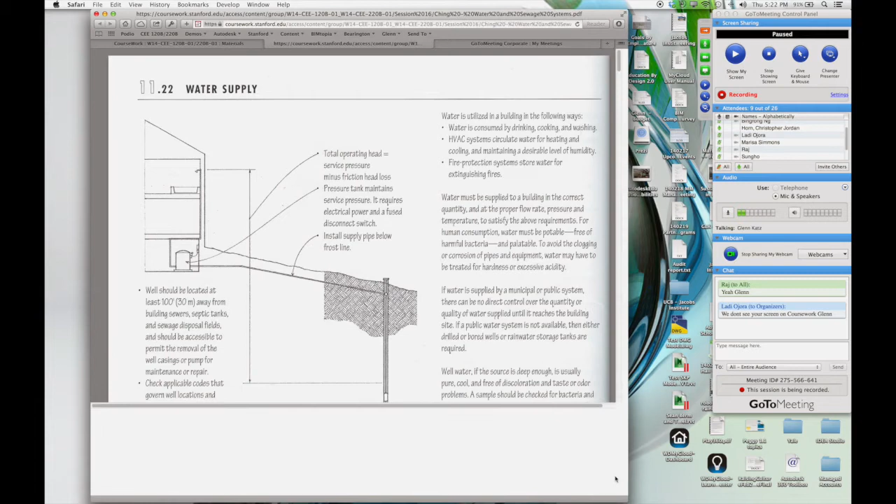In general, as we think about systems, there's supply systems as well as systems that take water away. Actually, let me open it up in my PDF reader instead, it's a little bit more fluid. I'll look at it online that way, but please go ahead and download it that way.

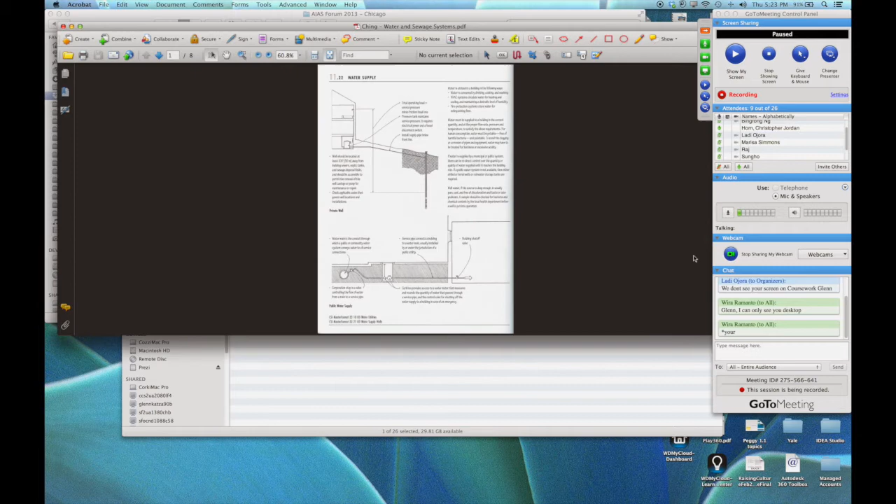Let me pop out of here, go over to session 16, and we'll get to that same reference. Let me pull that window over, make it a little bigger, and see if we can make that make sense. Hang on, let me show my screen. How about now? I think maybe I hit a pause in there somewhere. Very good, thanks Wira for pointing that out.

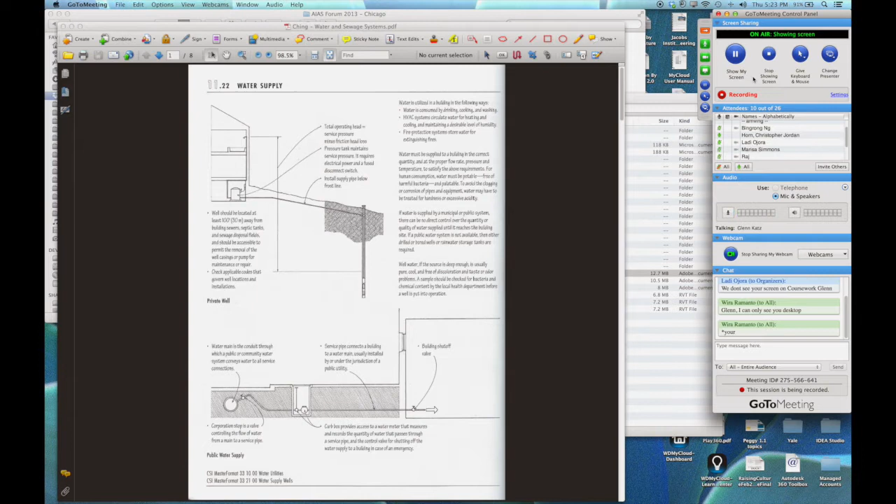Okay, so looking at this reference, there's a lot of useful information here. The important thing to think about water systems, both on the supply side and on the sewage side, is really understanding how water pressure ultimately allows the water to get to the final destination. What tends to happen is on the water supply side, these systems are pressurized.

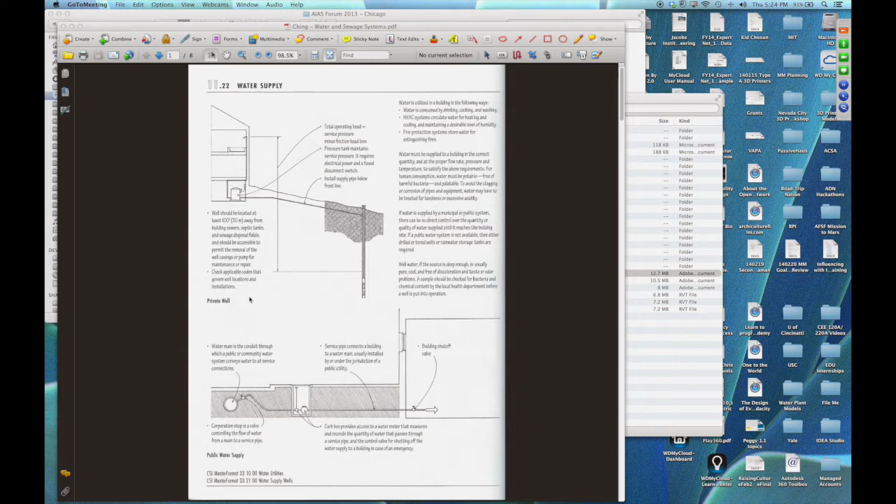So if they're coming from a well, we often take them into sort of a pressure tank, which feeds up into the building. What happens in a larger building in most city contexts is we'll do something that looks a little bit different.

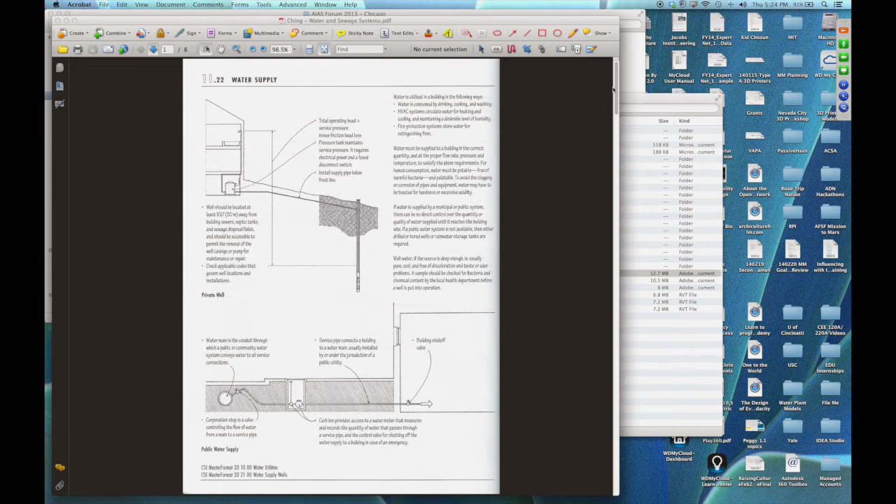Let me see if I can get a page forward to it. I'm saying go down and it doesn't want to seem to be cooperating. We'll figure out why in a second here. What's going on with Acrobat? Seems like it's locked up in some way. Nope, there it is, okay, here we go.

So, flipping on over - in most large buildings, though, as opposed to strictly depending on the water pressure just from the street coming in, what ends up happening is we set up a building system that's a little bit different, where we'll actually pump water into the building, pump it up to a tank, which will be up on one of the higher floors of the building, and then use gravity to feed it down to the urinals and the plumbing fixtures and all the different endpoint sources within the building.

An important thing to know about this is that depending on the height of the building, you may have many different tanks feeding things down. For water pressure, the height of the tank relative to the endpoint, the tap that's actually using it, really does a lot to influence what the pressure is, and we can put little pressure valves in there to moderate that. But if you have a tank much, much higher than the endpoint, you'll have very high pressure water, so we try to moderate that so you don't have incredibly high pressure on the lower floors where the height difference is great, and much lesser pressure at the upper floors.

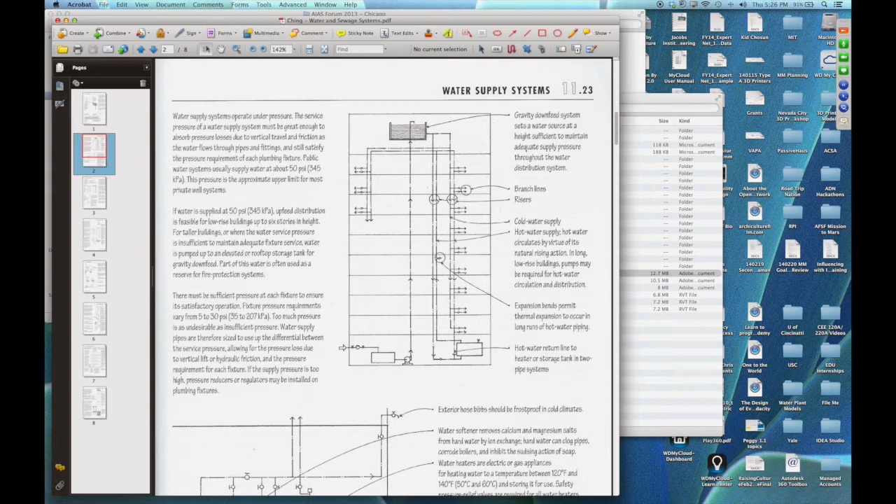But the whole idea of bringing water up to a tank and then feeding it down is actually a very common approach in a lot of big buildings. So you have a ready reserve, and you're not as subject to fluctuations in the main water supply throughout the city. You'd like to not depend on the pump pressure, but you can even pump it up to these tanks at off times, like in the middle of the evening, using power at night when it's cheaper, and then ultimately use the power or just gravity to feed off of it through the day, which tends to be a pretty good approach.

In terms of the uses and how much demand each fixture creates, every fixture you put on has a certain flow, a certain number of fixture units it creates. Water closets tend to be one of the bigger users, like 6 to 10 fixture units, urinals 5 to 10 units, while lavatories where we wash our hands are really not so bad.

Yes? Yes, Ladi? Oh, please, let's go ahead.

Okay, so let's see what's going on here. We'll roll on back. So starting with Bingrong, will the water pressure from the mains be sufficient to reach 2 or 3 stories?

Very often the water coming into a building is pretty high pressure, so it's enough to take it up there. But sometimes, even in the basement of the building, we have a pump which will give it the higher pressure to go up. So you might have a tank at the bottom of the building, and then add pressure to actually get it up to an 80-story or 100-story building or something like that.

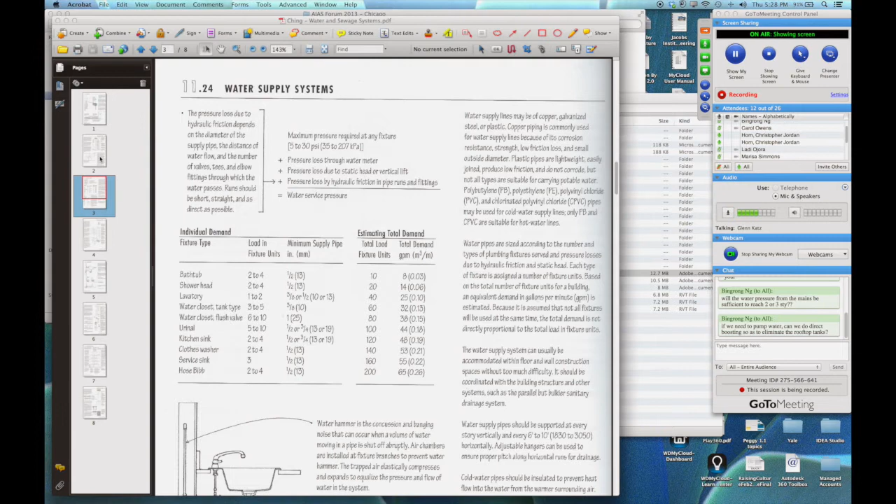In fact, on the second page of the handout here, let me see if I can get to that. It actually talks about that a bit down at the bottom here, that you can just feed into the building and then use pressurized tanks to push it up to the appropriate height.

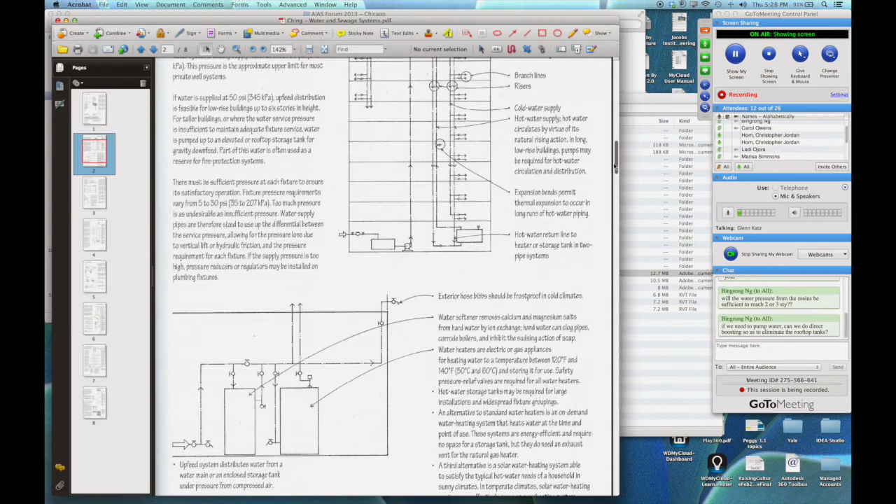But what tends to happen with all these systems is we need to control the pressure greatly. You really want a relatively even pressure, so that whether 100 different lavatory taps are on or only one is on, no one gets blasted by extremely high pressure based on the overall loads in the building. So we tend to segment systems into a lot of little parts with pressure valves to make sure we don't have to put an incredible amount of pressure behind the entire system, or that no one runs out of pressure because we all decide to take showers at the same time.

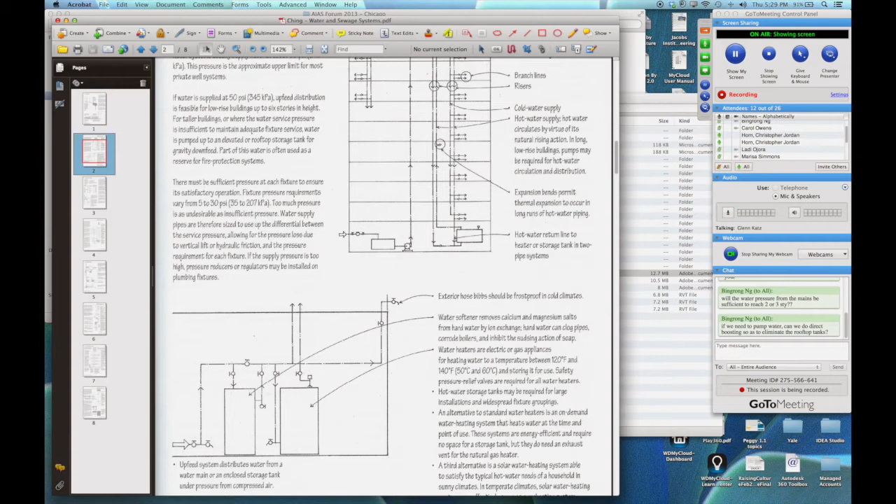So that whole notion of moderating pressure is actually one of the biggest considerations in trying to design a water supply system. Okay, so any others in there? No, those are sort of the biggies in terms of what's going on. These are good questions because this is really the heart of what's difficult to design in terms of these systems.

After we've supplied the water, we often get to the issue of how we drain the water away. Draining the water away typically goes to a sanitary system, but it could also go to a gray water system - we'll talk about that a bit later today - where generally we use gravity to feed water out. We tend to have, at the bottom of all fixtures, something called a trap.

Let's talk about that. Oops, pop back over here again. Actually, go back up to that one - page 5 was the better view.

The idea of a trap is that, as things are being fed down through gravity, there's actually air in the system that ultimately needs to be vented out, because when we're depending on gravity, if we don't have air behind the water, we'd have suction - we'd actually be creating like a siphon, and we wouldn't want that. If we have air flowing back into the system, which is necessary to get the water to drain without creating suction, what we need to do is have a way of preventing that air from getting back into the building.

Okay, because that air tends to be not very fresh. We'll call it sewer gas. It's typically contaminated with all the odors of the sewer system. So what we tend to do in the bottom of most sinks, in the bottom of toilets, in the bottom of most drains, is actually have this small area that we'll call a trap, which stores some water. And that water is really just all about providing a block for the air.

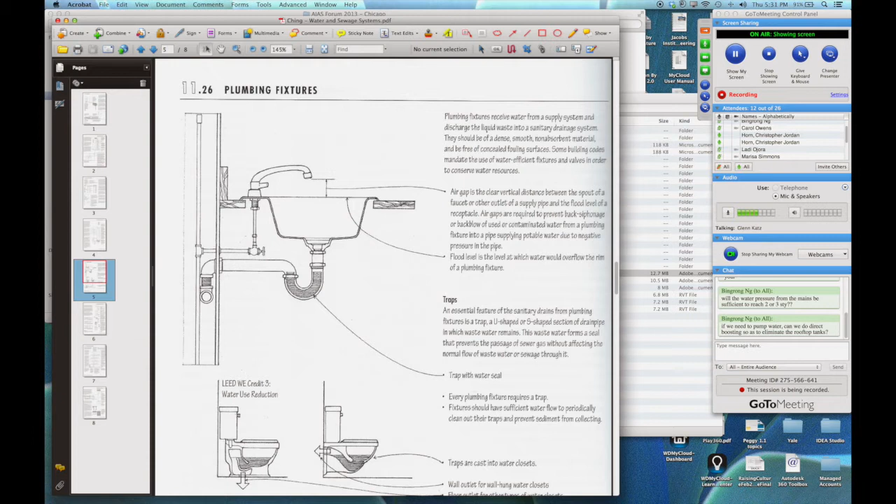As new water is flushed through the system, that block is removed. It'll flow through there and water will be left in its place. So even after we flush out a sink or we flush a toilet, the last little bit of water actually stays in the trap. So even in the bottom of a wall-hung toilet or a gravity or floor-mounted toilet, you still tend to have these little traps in the bottom, which are all about preventing that backflow. You don't want the air getting back in there.

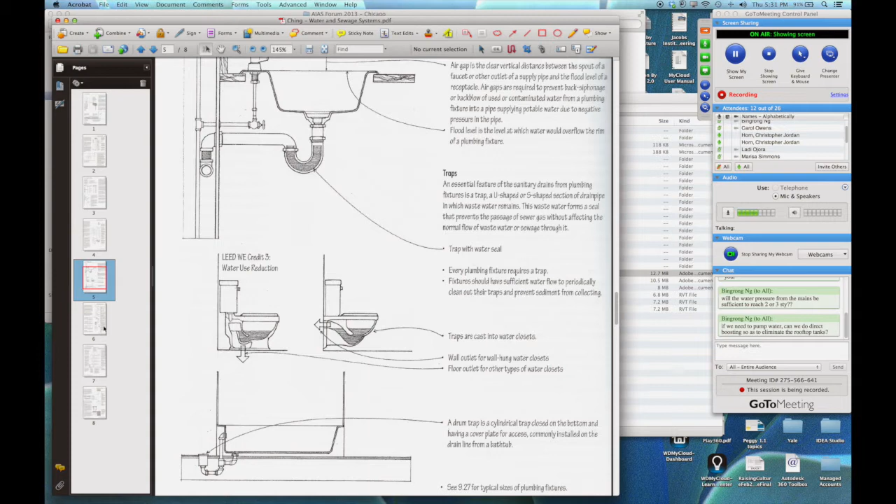Okay, and that's part of the design of the sanitary system. There's all sorts of connections for doing that. But in the sanitary system, at the end of the day, we have a combination of both drain lines. Let me zoom in on this a little bit, hopefully make it a little bit clearer. Will that zoom in? Maybe not. There we go.

We have both drain lines coming out of the fixtures, so out of the bottoms of sinks and the bottoms of the toilets, but we also have ventilation lines which come up and then ultimately feed out to the roof of the building. Okay, and what do those vent lines do? There's not water flowing through there. There's really just air flowing through there that's actually allowing the water to flow out. So a good drainage system actually has both those components: the water draining out and the air coming back in, so that everything flows nicely.

The other thing that you need to know about drainage systems that we talked a little about in 128 is that the drain lines need to have a slope on them. They slope from the source all the way down towards a central riser. This is going to go dropping down between all the different floors, and it needs to be at least 1/4 inch per foot. And that's to keep everything moving by gravity. If that didn't happen, some of the solid waste could get stuck in the lines and create a blockage. So we need to watch out for that as we're placing them.

So water, cold water and hot water lines, those tend to be under pressure. They can be at any elevation, but drain lines we need to add that little bit of slope. Okay, so let's go ahead and start with that and just try connecting some really basic little systems. This will be similar to what we did in 120A, but it'll give us a starting point for the transition to thinking about more complicated systems. So let me start with that.

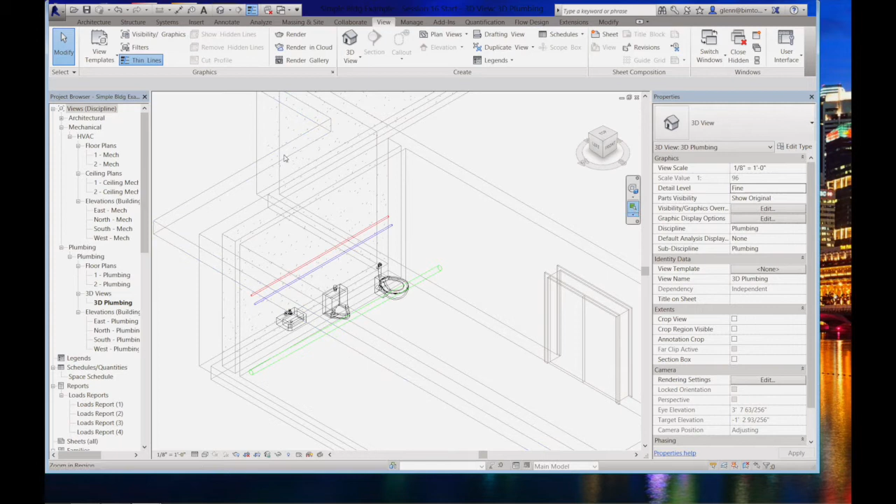And to do that, I'm going to move on over to Revit. Okay. And I've actually opened up that session 16 start. In that model, there are already some pipes placed for us. I'm moving the model as opposed to doing my zooming. Hang on just a second here. Try it again. I'll zoom in here again. And you'll see there's a couple of different pipes in here. There's a hot water line, a cold water line, as well as a sanitary line.

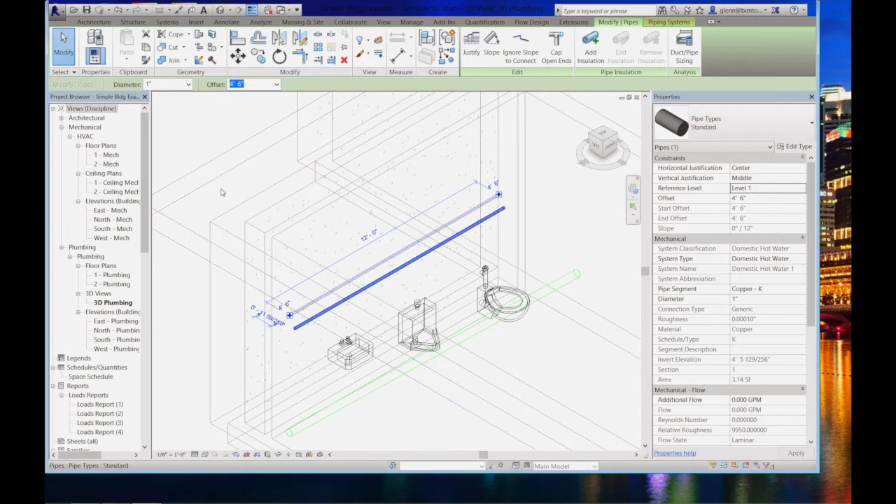Let's talk about how those got there and how you can get them there too if you haven't had any experience, because it's actually pretty quick. What I'll do is just take these ones out. I'm just going to backspace those to start with.

Okay, so now I just have some fixtures. I have a urinal, I have a toilet, as well as a sink, a lavatory here. And each of those different fixtures have ins and outs on them. So on those, for the toilet, there's a 4-inch out, there's like a 1/2 inch in with 10 fixture units, 4 fixture units out.

The urinal just has cold water also coming in, a fewer number of fixture units on a 3/4 inch line, a 2-inch line going out. And over here on the sink, we actually have a hot and a cold, as well as the sanitary going out. So we have those different units.

As you're placing things, if you haven't placed elements before, and this is new, what you do is under the systems, you can go through and place plumbing fixtures. You can load in some plumbing fixtures. And let's talk about the difference you need to know about in terms of plumbing fixtures. If you go down into the plumbing category, there are really 2 different subfolders in there. There's an architectural folder and an MEP folder. They look amazingly similar because you'll find toilets and urinals and water closets in there in both sides.

When we are doing systems design, we actually want to use the MEP versions because the MEP versions are ones that actually have the connections. They have the ins, the outs, and all the flow information. So if you're working with fixtures that don't have that information, it's just that we have the architectural version, not the MEP version loaded. Let me kind of illustrate that for you.

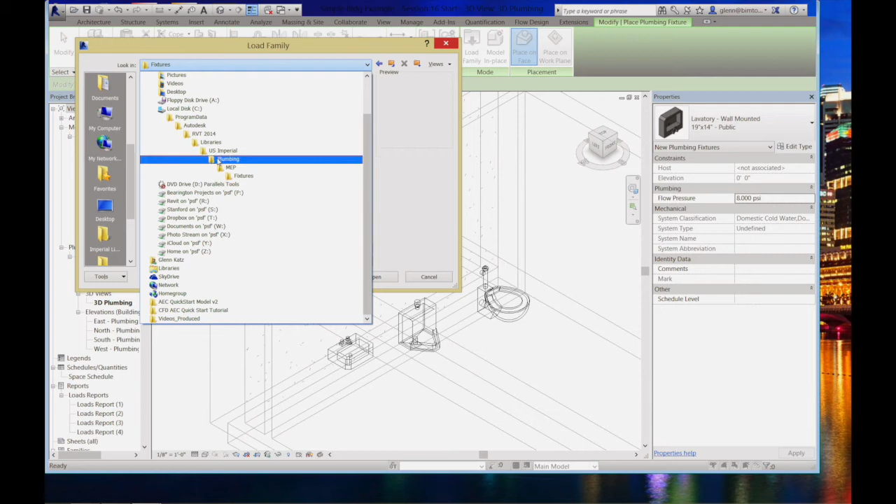If I come on back to the plumbing, and I'll go to the architectural, and see if I can grab a toilet out of there. So a water closet here. See if I can place this somewhere. Okay, I'll put it on that wall over there. Okay, not a good architectural design, but it'll illustrate our point.

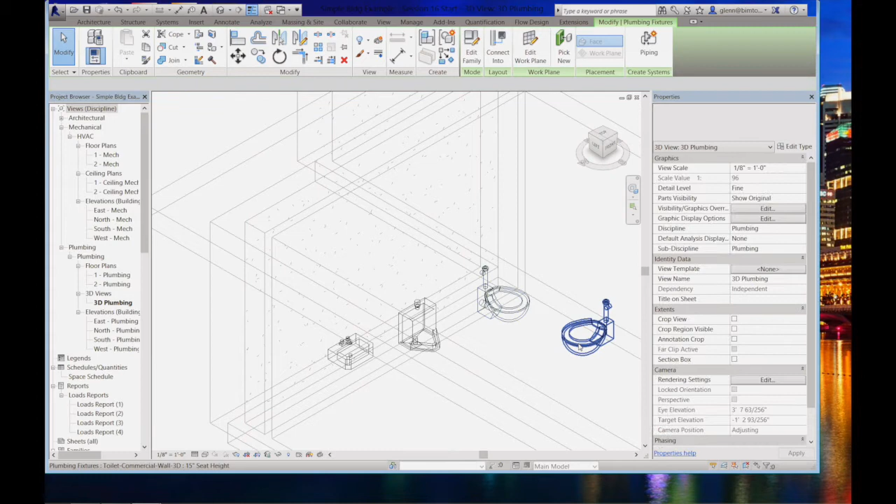These 2 toilets look amazingly similar, but you might notice a small difference between them. This one over here actually has a little more piping to it. You can sort of see a drain pipe going through the bottom of the bowl right there. And if I click on that one, you'll see that it indicates that there's some in and out information. If I click on this one instead, you'll see that it doesn't. It's just an element, just a spatial element. So it doesn't have that systems information.

So if you've already gone ahead and put some things in using architecture elements, go ahead and swap them out if you can. I have that architectural element there. You should be able to go through and change to a different type. So there's currently, for a public building, a relatively low flush one, I'll just swap out the type here. Actually, it says it's not going to let me do that just as a swap, so I might have to go ahead and delete it and replace it. I think it just has to do with the way the thing is hosted.

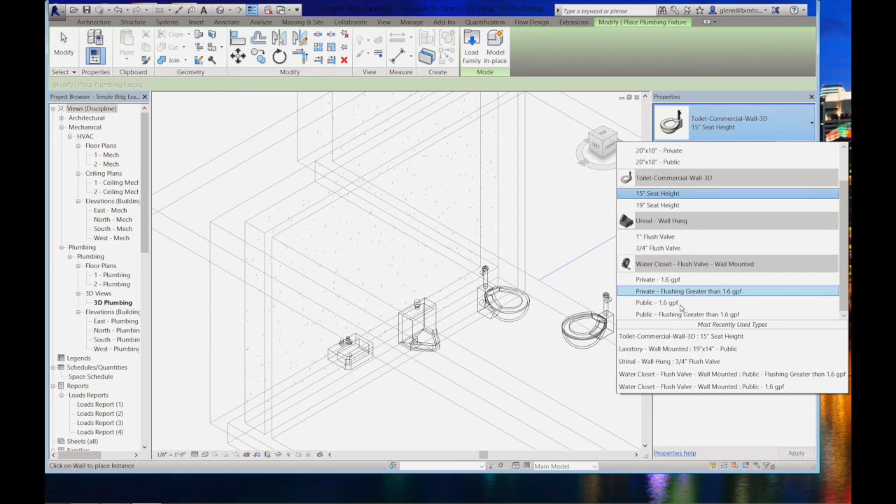So not to worry. I'll just come over here, take that one out, put a new one in there. Actually, the better order might have been to put it in there on top of the old one, just so I can get the location information before taking out that one. You put that fixture in. It's trying to stick to the floor.

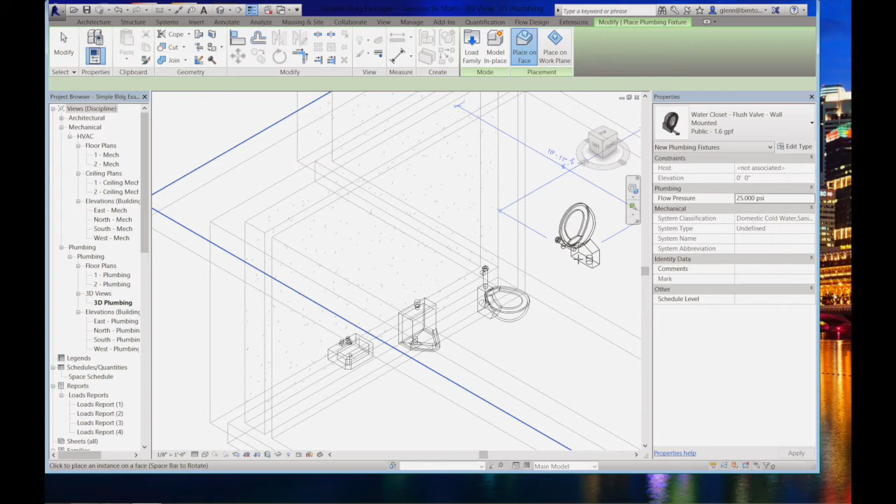Let me see if I can place it on a face. What I'm trying to do is not place it on the face of the floor. I'm trying to place it on the face of the wall over here. I need to see if I can convince it that it wants to do that. That's just rotating it. Let me do it from a floor plan view. That might be a little bit easier. Whenever I'm doing things in 3D, you'll remember I always get myself in trouble. So let me go to the floor plan view, try placing it there.

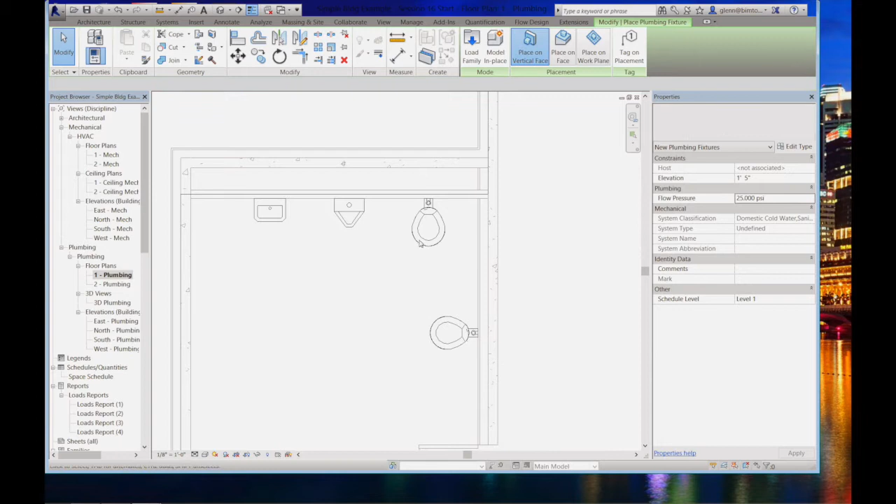Plumbing fixture, I'm going to place it on, there I get even the choice of a vertical face, which is even a little bit better. So now I can put it right on that wall. And again, I know it's the right one because it has the ins and outs. If you click on it, it has some in information. Okay, there's actually some out information in there too.

Okay, but once we've gone ahead and placed some units, the basic idea of placing the main pipes is as follows. We're going to put some pipes in here. We're going to put some pipes in for hot water, cold water, as well as the drain line.

And as we're thinking about putting pipes in, the important thing is to think about the height at which you want to run the different systems. For example, on the Systems tab, I can choose pipe. Let's think about different types of pipe that we might want to run. The sanitary pipe is probably the most complicated one because it involves a little bit of slope.

So as we go through and think about placing a pipe, for the drain pipe a good place to start is say 4 inches in diameter. Depending on how many different drains are going to come together, it might ultimately have to be a little bit bigger than that, but that's a pretty good starting point. And every pipe has a system it belongs to, so I'm going to put that into a sanitary system right now.

And also think about how high off the floor it's going to be. Drain pipes I'd like to put very low to the floor, or even below the floor if we have a multi-story building. So I'm going to let that be very close to the floor. I have a choice up here of whether to have no slope, or have it slope down or slope up. This just has to do with the order in which I'm going to draw it. Am I going to draw it from the downhill side up or the uphill side down?

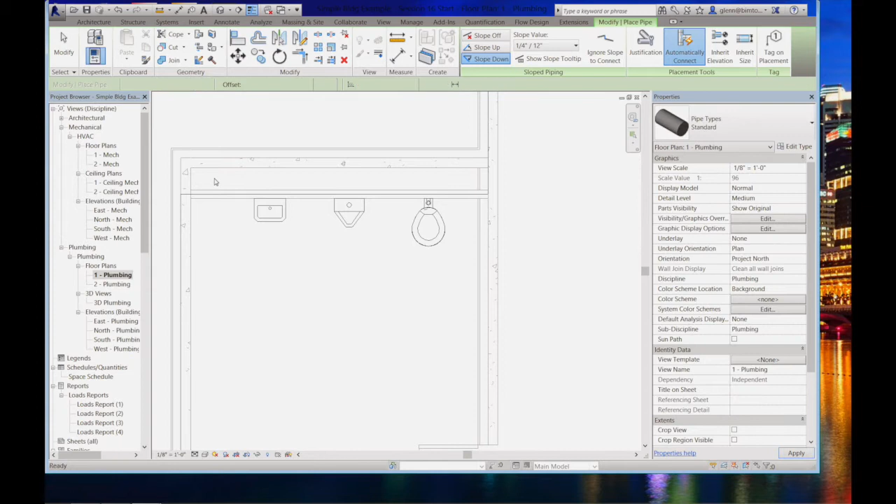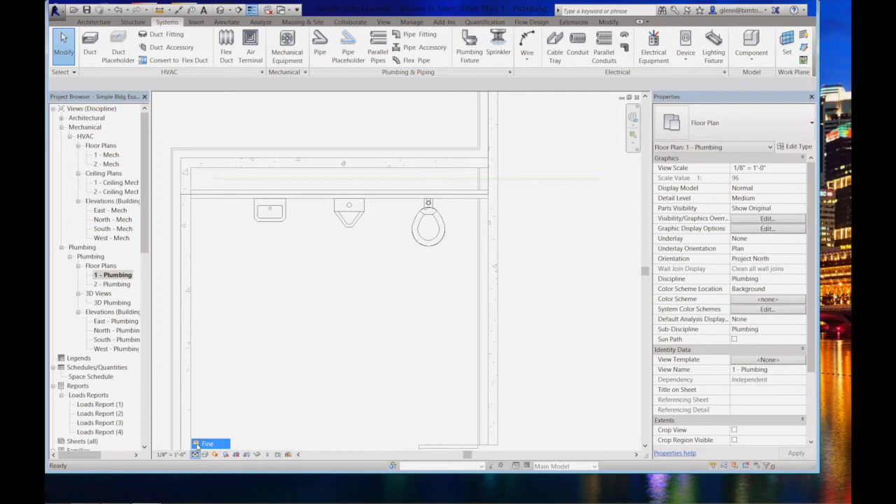And I will actually run it even longer than it needs to be. I'm going to run it from here all the way down, and just take it off somewhere. Now, this pipe is showing up with a couple of attributes that are interesting. It is a green line. Green is a color that's associated by default, as part of the plumbing template, with the sanitary systems. If you want to see that better, as opposed to a single line, we can turn up the fineness of the drawing, and that'll give it a full width as opposed to a single line representation.

Very much like with structural systems. Structural systems do the same thing: single line representation versus seeing the full thing. Now, I have been drawing in the plumbing floor plan. You might be drawing in the mechanical floor plan. In the mechanical floor plan, notice that I'm not seeing it. When the discipline is set to mechanical on a view, I'm not seeing the plumbing elements. There's another view in this file, which is the plumbing floor plan. The only real distinction is it's set to the discipline being plumbing, but you can change that back and forth.

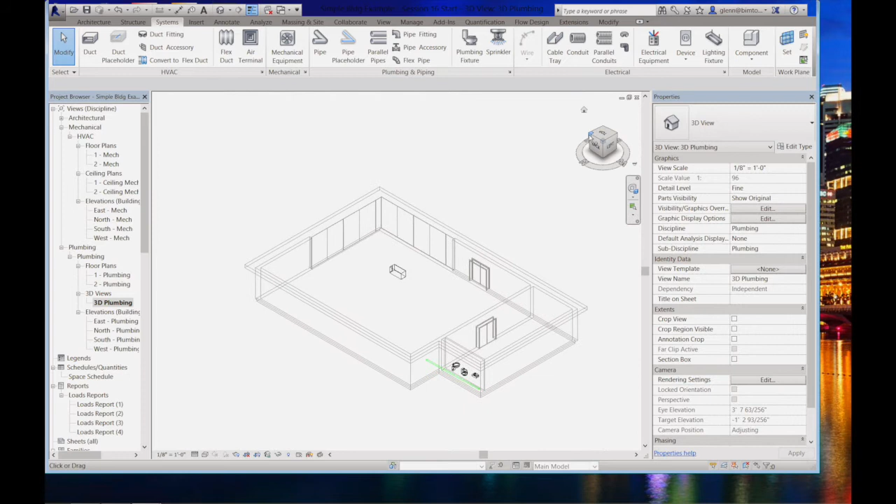And depending on what you're actually showing right now, you may not see the plumbing pieces. I'm going to change it back to plumbing, and put it back in that part of the browser so I can make sure that I'm going to see it. Okay, so I got a basic drain line there. Let me go to the 3D plumbing view and show it. If I rotate it around a little bit, you can see it over there, running in the cavity behind those fixtures, but hopefully a little bit lower than the fixtures. I tend to like everything to drain down to it.

You can see in this view that it actually has that downward slope. Okay, so far so good. Let's pause there for a second in terms of putting this basic drain line in, and see how that's feeling with people. Do we have any questions on that side?

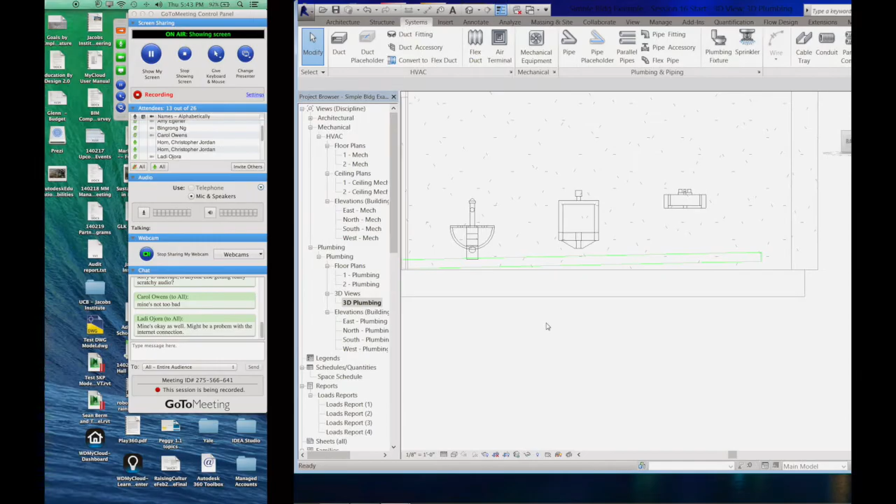Oh, we got some scratchy audio there. Let's think about that. It's probably, I'm wondering if it has anything to do with the thing I'm wearing around my neck as a microphone. So is anyone else having trouble with the audio? Let's see if we get a sense on that. Carol's not too bad. Ladi's okay. How about Julia? Are you doing any better now, or how's it feeling? Raj's is perfect. That's good.

Not sure why. I wish I had a good solution for that, Julia. I'm not sure. Sounds okay? Okay. Well, I'm trying to figure that out. I don't think I have a good answer for that one right offhand. Hopefully it won't be too awfully bad. You can still make it out. Thank you, Julia. Okay, appreciate it.

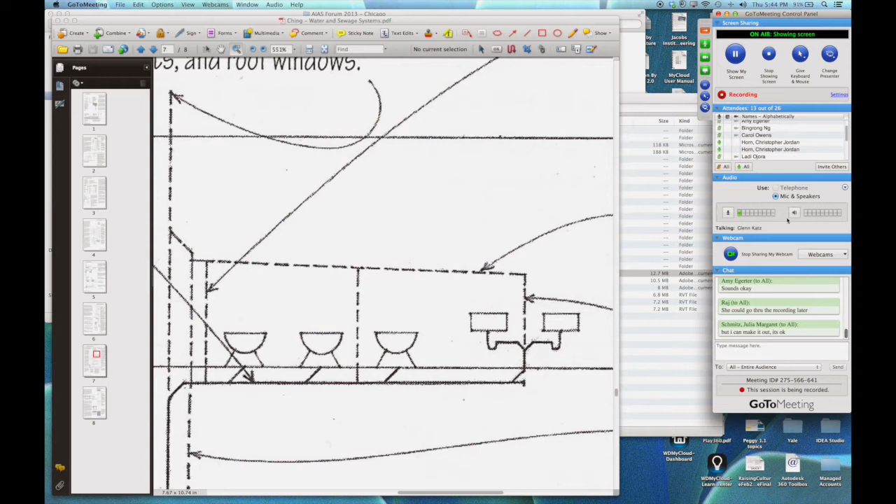Okay, let's go on back. So we'll switch back over here and put in the other piping. So the other big pipes that we're going to put in that are the main ones are, again, the hot water and the cold water. And again, you guys have had some experience with that if you took 120A. Let's just go to the plumbing floor plan and we'll put those in. In terms of putting those pipes in, I'll say it's going to be a pipe.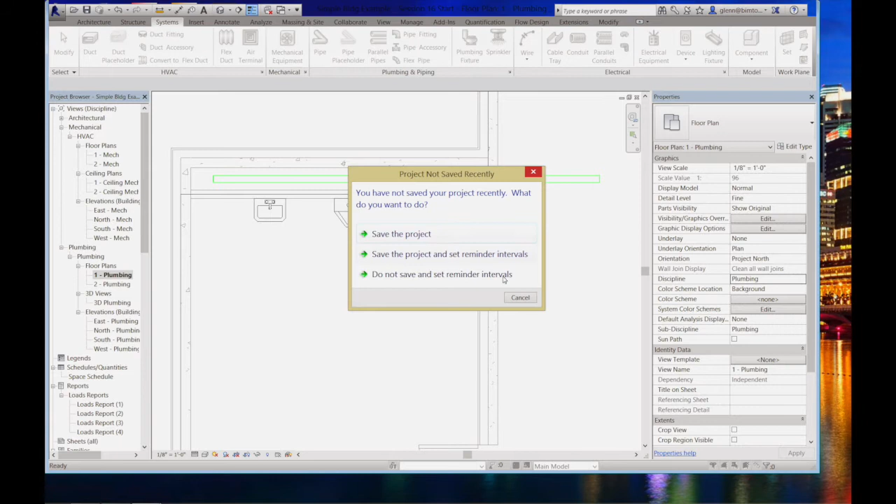And for these pipes, I'm going to change them up a little bit. For the hot and cold water pipe, I probably only need a 1-inch pipe. That's a pretty good starting point assumption. Again, we can change that around a little bit later, but 1 inch is probably pretty good to get ourselves started.

I'm going to change the offset. For these, I actually tend to like to put them a little bit higher so they're not interfering with the drain lines. And we can change it whichever way we want. I'm going to put low, for example, at 4 feet high off the ground. I'll make that my hot water line. I can change the system over there to say domestic hot water.

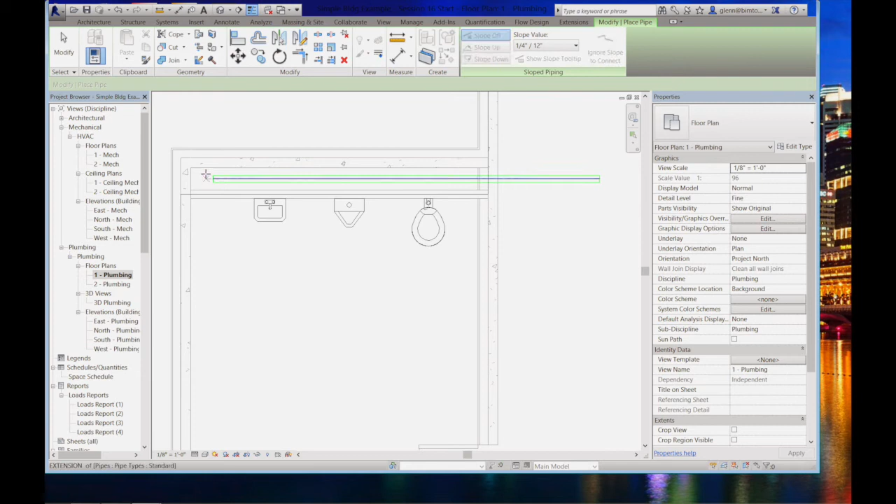Again, I can put that even almost on top of that other line since they're going to be at different elevations. Or offset it a little bit. That looks like it's back a little bit too far. It's running through the wall. I can move that in a second. Okay. Notice it shows up red because it's a hot water line, and that's just a filter set to display it that way.

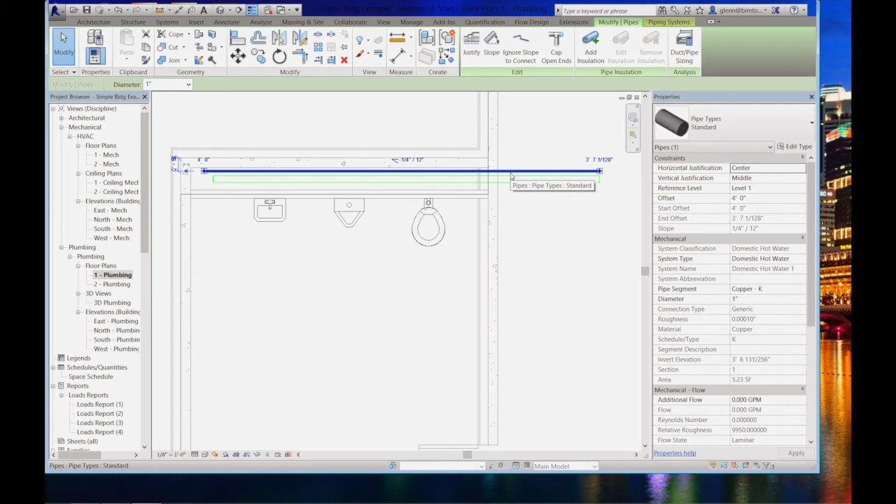I'm going to put in a blue line now for the cold water. So again, choose some pipe. And in the same sense, this time I'll change it so that it's not at that same 4-foot level. Oh, actually, let me fix a mistake I made over here. On that hot water line, I think I still had it saying sloping down, and it doesn't need to be sloping down. In fact, let me take it out, and I'll put it back in again so it doesn't have the slope.

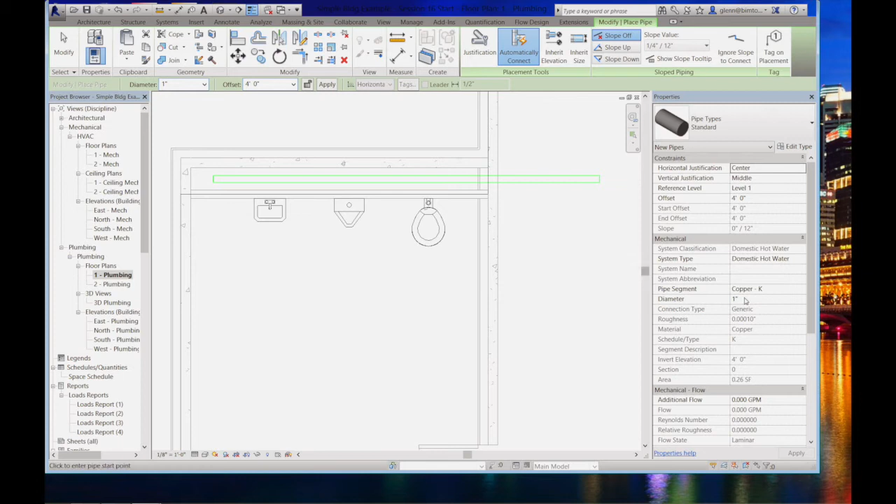So I'll say systems, pipe. Okay, I'm going to turn the slope off on this pipe, make it 1 inch, put it at 4 feet. The reason I knew that it had sloped down was just that the height had changed after I drew it. So domestic hot water. Okay, there we go. Running it off into space here. Eventually, these will all be tied into risers, but for right now, we're just going to look at them in a very isolated system.

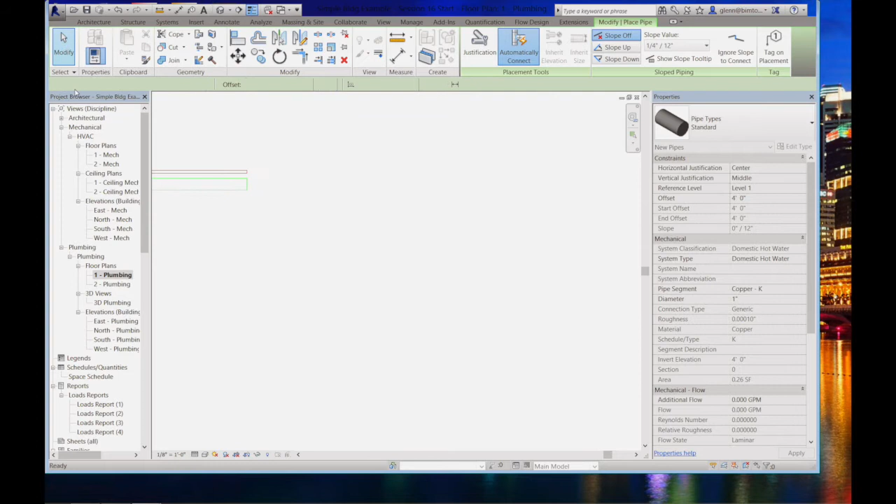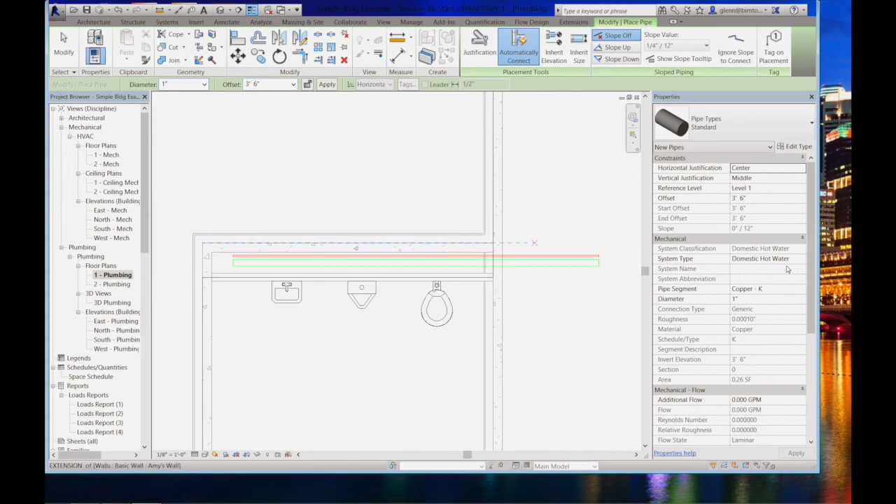Okay, so we have a hot water line in there. Let me put in the comparable cold water line. So I'll zoom in on that area and do a very similar thing. I'll take the piping. In this case, I'm going to choose a slightly different elevation. So I'm going to put it about 3'6" off the floor, just so they're really running at different heights. It's going to minimize the conflict or the interference between the two different systems. I'll say cold water. And I'll put that in here too.

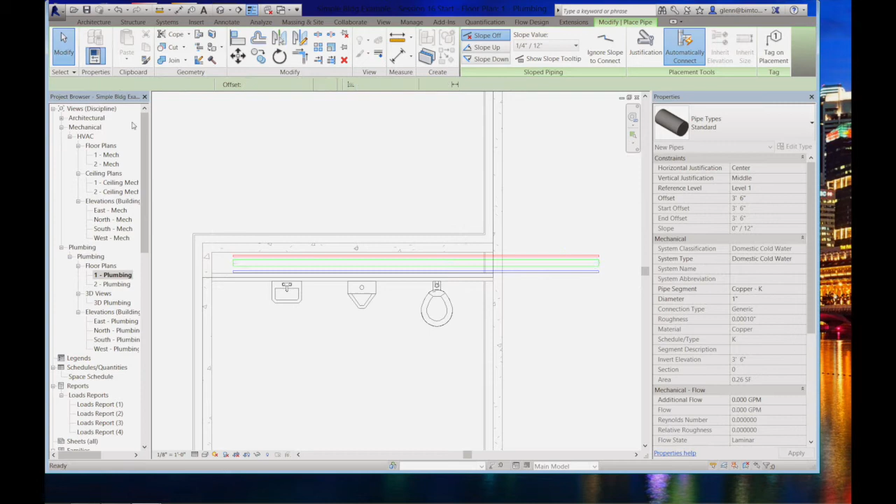Beautiful. Okay, I tend to like to run the pipes beyond the system. In terms of working with little subsystems like this, I want to minimize the amount of connecting into the wrong location. So let me tell you what I mean by that. If I go back to the 3D view, or let me go to the 3D plumbing view, that's really the one I want, because it won't include all the mechanical elements, it'll just focus on the plumbing elements. Here's the situation that I like to guard against in terms of putting these together.

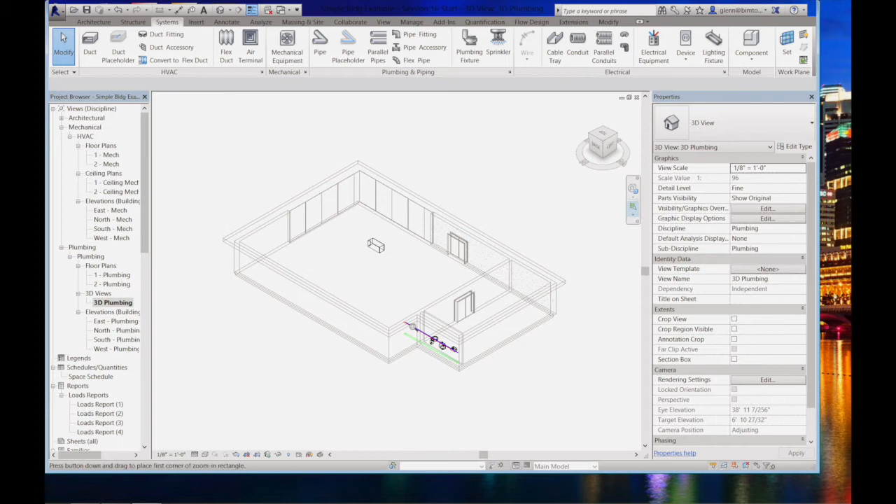What we're going to do is connect these different fixtures to these pipes as a series of systems. It's going to be a hot water system, a cold water system, and a sanitary system. Connecting things to systems actually works out to be pretty easy. We can choose something, say that we want to connect it into something, it'll add it into a system, and it'll implicitly be understood what it's all about.

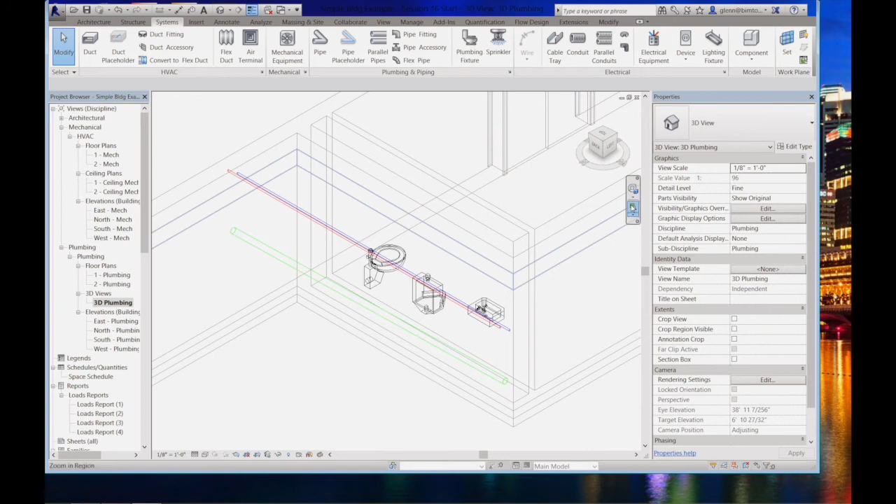The problem sometimes is that when we connect things into systems, Revit will try to choose what it considers the easiest route. And the easiest route sometimes will be to connect things to the ends of pipes, which isn't necessarily logical. We would often want to break the pipe, put a connection in there, a split, so that there's a shorter length of pipe tying into those main ones. So here's what I suggest to get around that. Choose a pipe, for example the hot water pipe or the cold water pipe, and say cap the open ends.

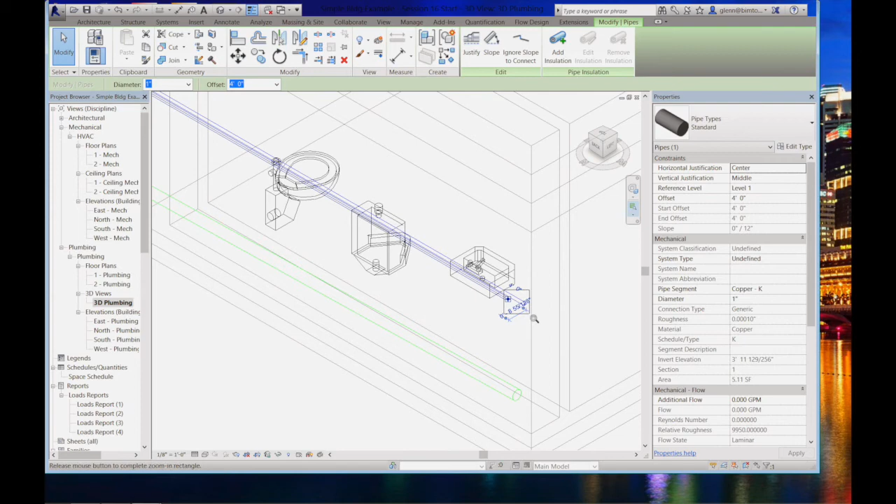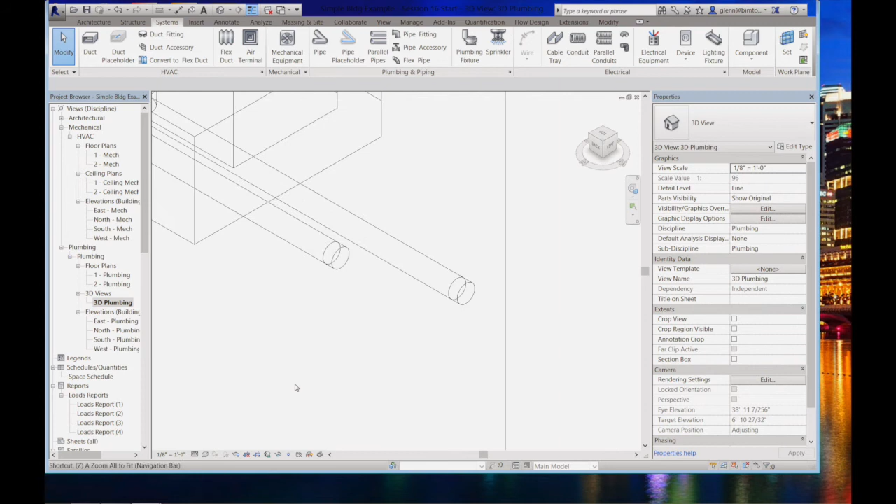What's that going to do? It was so subtle you probably missed it. It's really just right down here. You see, it put a little cap on the end of the pipe. Same thing over here. And why am I doing that? It's just so that I don't put things on that connection just because it looks like the easiest open pipe connection to tie into. It'll make it a little more accurate. We'll take that off in a little while, but that cap is a good thing to put on there temporarily as we're working.

Again, let me go ahead and cap this system. And now as we're connecting in, it's going to do a better job of inserting itself into the middle of the pipe as opposed to trying to connect to the outside of the pipe. So again, just choosing a pipe, if you want to cap everything that's open, we can say, actually, it's not open now, so we won't be able to do it.

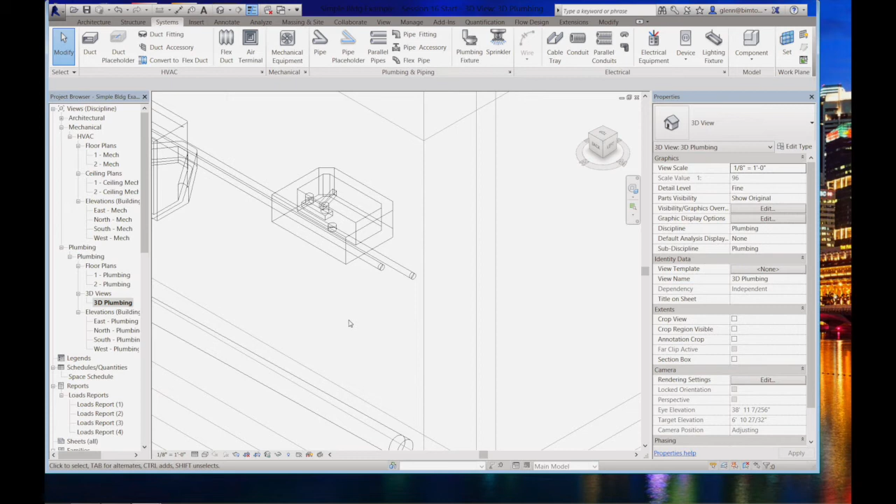So I want to tie some of these different things together. For example, this little lavatory needs to be connected into the cold water pipe. Let's connect it into, and we get to say which connection we want. I'm going to say the cold water. Then we get to choose which pipe that was, and I don't remember whether mine was the upper or the lower. When I capped it, it made it independent of the system. Put it down to the lower one. Okay, did a pretty good job there.

In the same sense, I could take the urinal, connect it into. The urinal presents what elements it needs to connect to, and there's the domestic cold water. So I will tie it into that same piping system. Looks like that one.

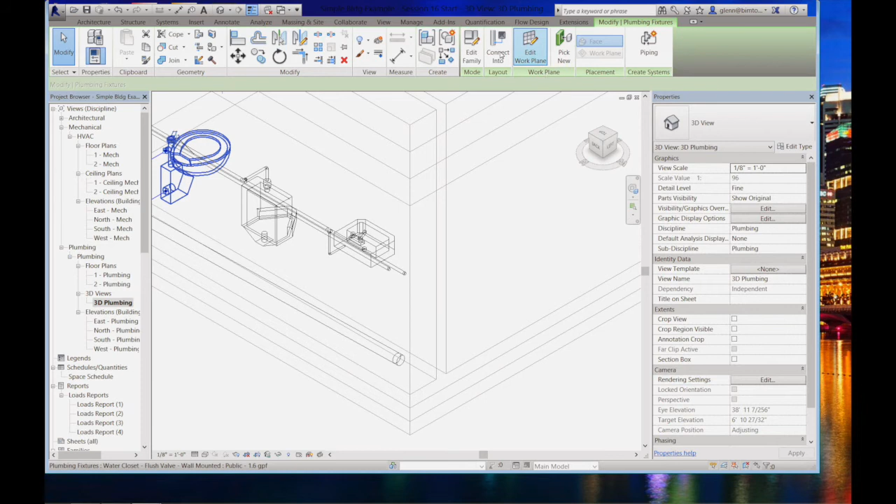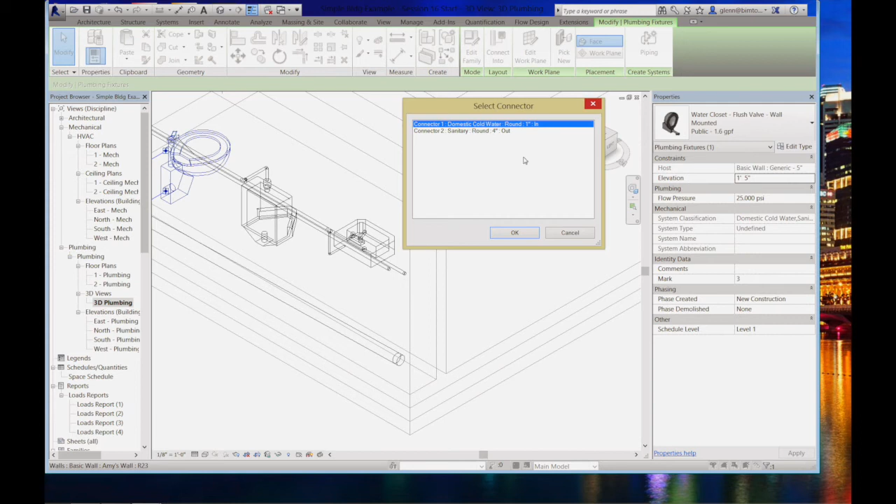Finally, I'll do the same thing with the toilet. I'm going to connect it into, and it's going to ask me which connector to use in just a second. It's a little graphical goober right now. See if I can do that again. Oh, there it is. It just took a minute to draw it. Let's try it again. Connect into, domestic cold water, and we'll tie it into that system.

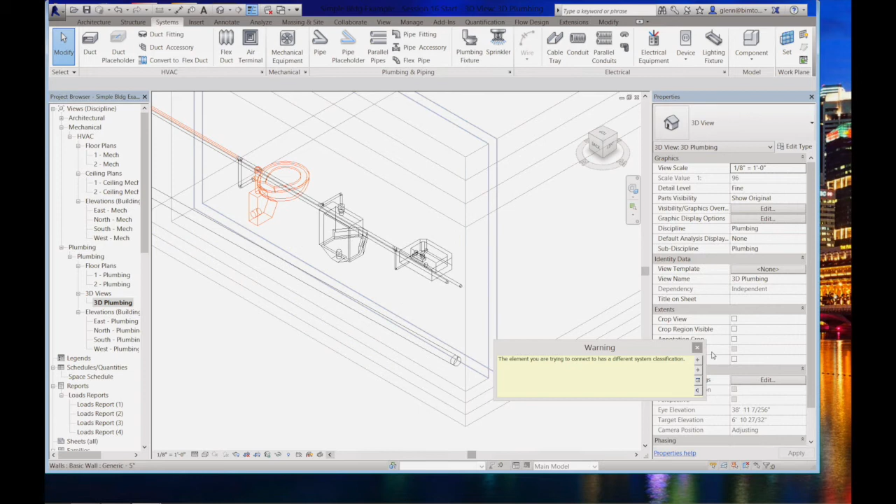Oops, did I tie it to the wrong one? No, it looks like it's the right one. I'm going to leave that be for now. It's warning me about something, but I think it's just a little confused. Let's see how we're doing in terms of this as an overall system. So we could choose that pipe. Right now it says it's an undefined system. Let's see if I can switch it back over. I think it's mad at me because I capped the system, so let me uncap it now.

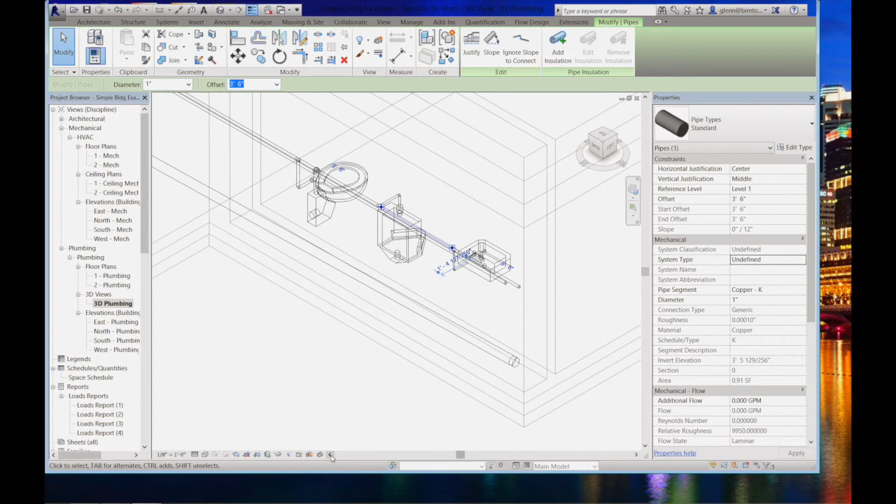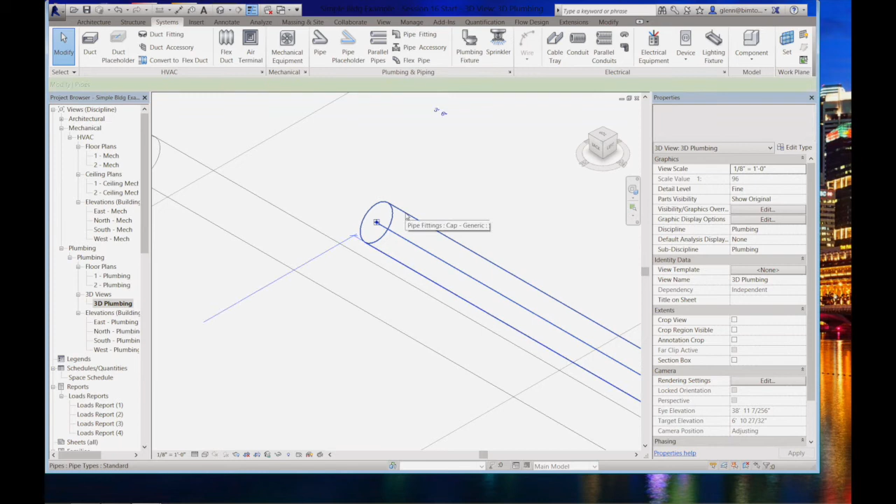What I'm actually going to do is come to the end of the pipe over here and just remove that pipe cap. Now I should be able to choose that this is actually part of... it's still going to fight with me. I'm tabbing a little bit to kind of select the entire system.

I should be able to select that and actually tell it that it's part of an entire system. Oh, that's the hot water right there.

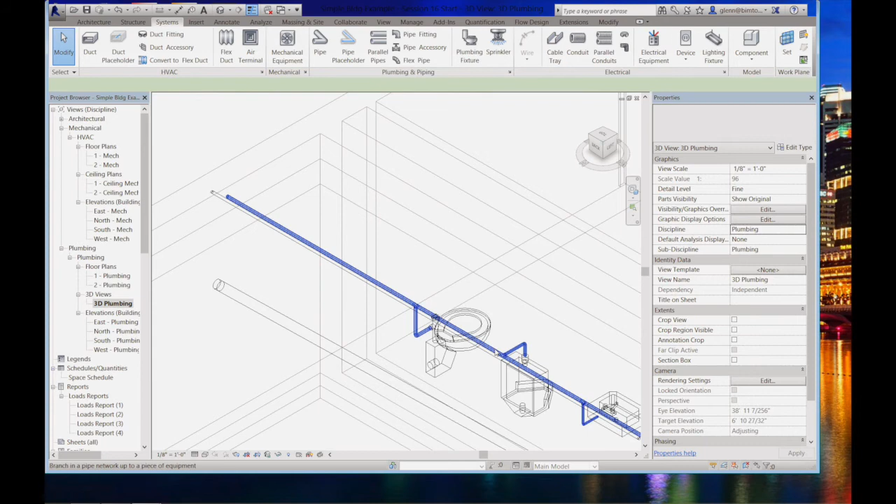Okay, it's a little confused there, so let's see if I can go ahead and fix this right now, because it's really where I got myself in trouble with capping it. Let me see if I can figure out what it thinks it is right now, and see if we can fix that. If we want to understand about the systems defined in the project, what we can do is this.

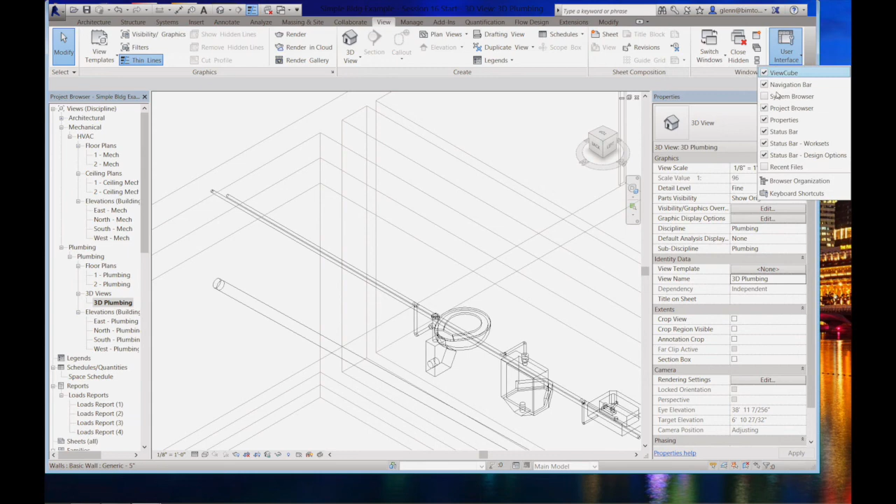Under the View tab, you can turn on the System Browser. That's interesting—it doesn't think of it as being a system right now.

Oh, hang on. It does think there are some elements here. Okay, that's a piping system. There's a domestic cold water system here. Right now it has lavatory, urinal, and a water closet in there. Okay, that looks pretty good in terms of what's going on.

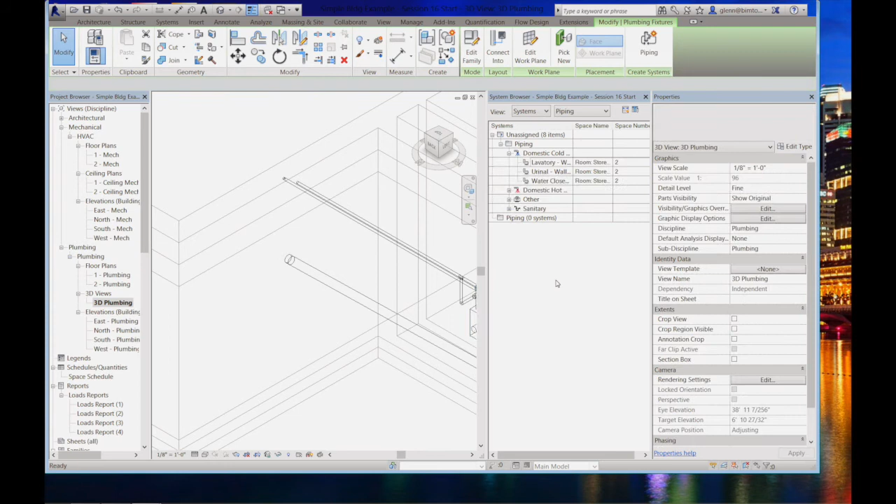It should think of it as a domestic cold water system. It seems to understand it over here. What I'm sort of fussing with on the other side is to get it to show it to you graphically.

So let me see if I can make it happen. Over on this side, what happens is if I choose a fixture—it's a little confusing in terms of my order of operations. Let me see if I can bail this out for you.

I think where I got myself in trouble is I was trying to be opportunistic about capping that system because I thought that would actually help me out. So let's see if we can make this work.

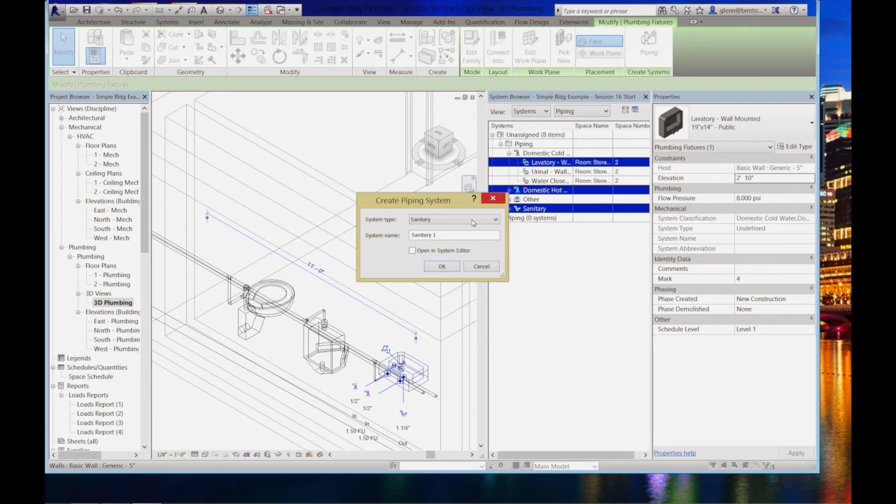I'm going to choose that guy over there. I'm going to say create a system around it. So that's going to be—it knows that I'm already in the cold water system.

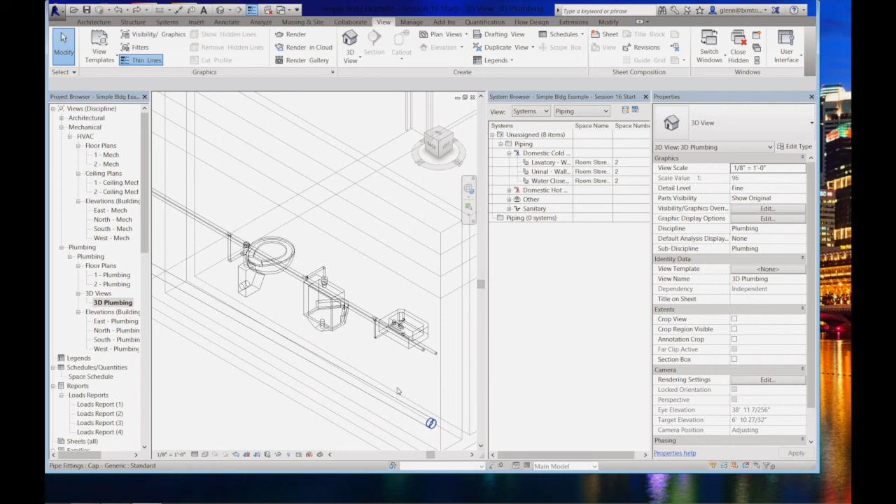Let me control-undo that. I'm trying to think about how to get myself out of trouble on this in terms of that cold water system. Maybe I'll do the hot water system and then we'll get back, or do the sanitary system, and we'll figure out how to make that system understand what it is. Because the problem is it's just a little confused about what its type is right now.

We know that it is—it thinks it's an undefined system. But it's just sort of a little bit confused about the current state. So let me see if I can make this work a little bit better.

I just took the pipe cap off the sanitary one. Let me see if I can redefine that as being sanitary again. As soon as I capped them, it really decided to give me all sorts of trouble—which is a very unfortunate thing. Let me try uncapping it on this side again.

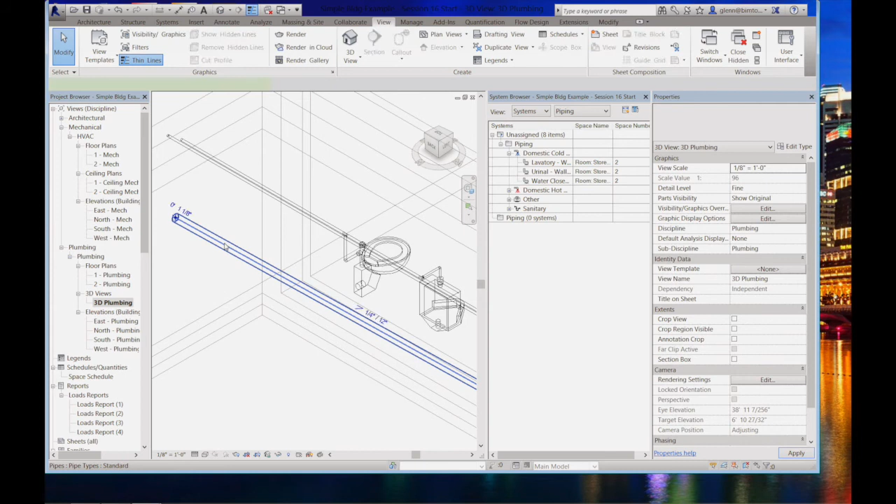I'm struggling a little bit to try and figure out exactly how my order of operations messed things up, so I apologize for that. But let's see, because the key is we have to basically get it into thinking that it's back to a sanitary system again.

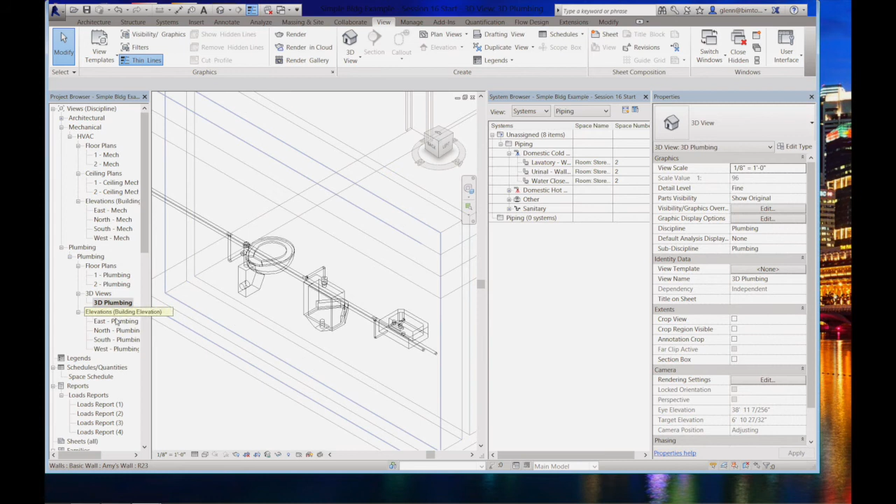That pipe's lost its designation, and we don't like that. I'm going to take that pipe out and just put it back in again and see if we can get this figured out. Again, I apologize for the kind of roundabout way of doing this, but hopefully we'll make this work in the end.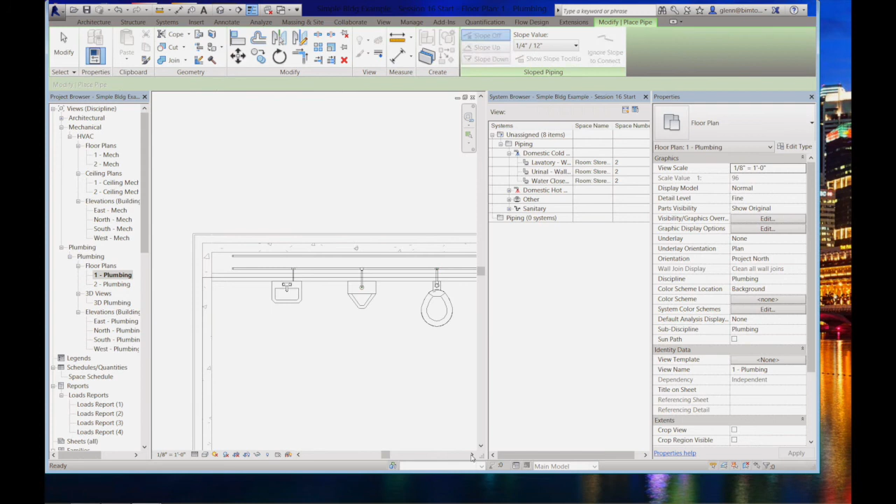Systems. Pipe. Going to put it off the floor at 6 inches again. It's a 4-inch pipe. It's understood as being sanitary. I'm going to slope it down, and I will draw it again.

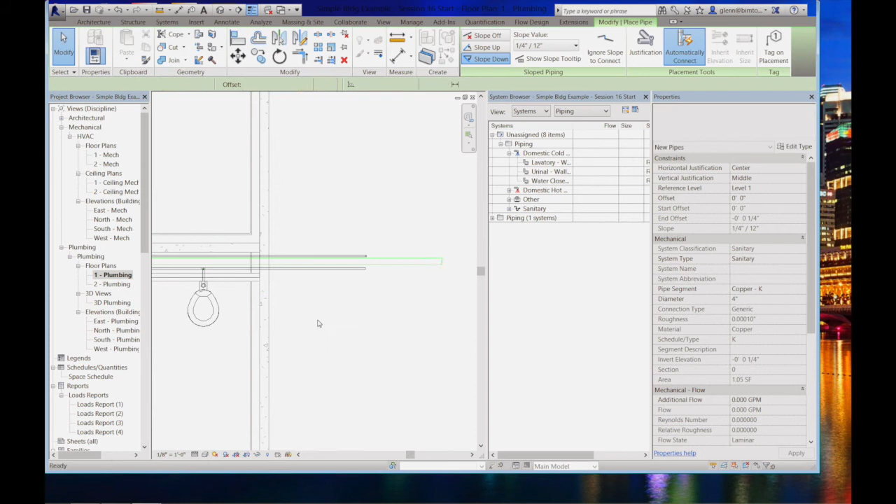I know that it's good because it shows up in green, so that's the part I like. What I'm going to recommend is, all my advice about going through and capping the pipes to prevent things from tying in bad ways seems to be making a bigger mess than we want. So I'm going to say ignore that advice and let's go back to tried and true. I'll put that one in at 4 feet again.

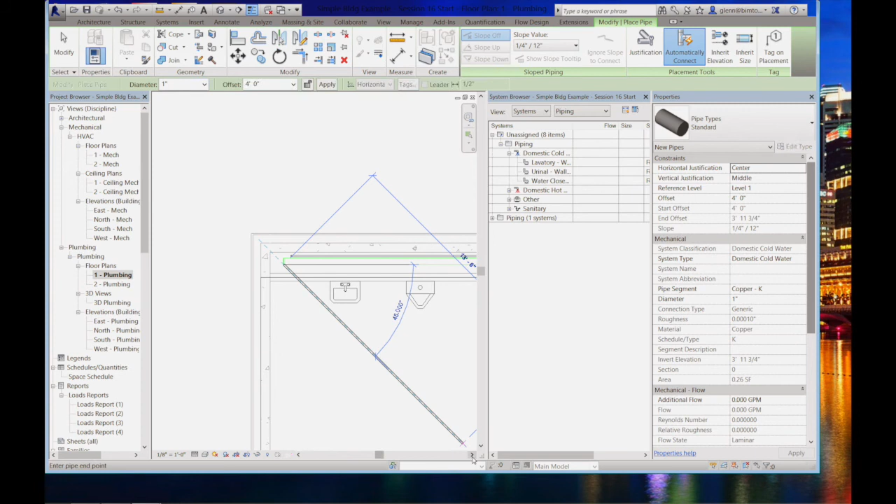It's domestic cold water. It looks like it's trying to connect just because I indicated they're drawn on top of each other. Actually, I want to say slope off on that one.

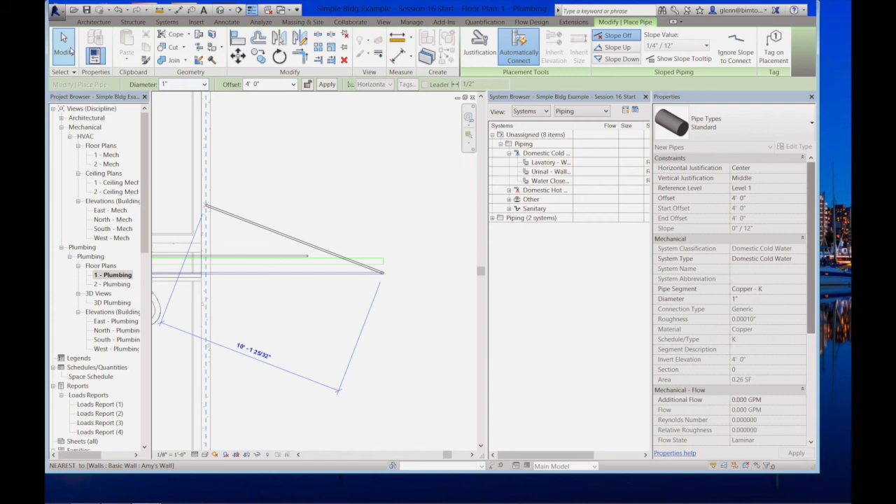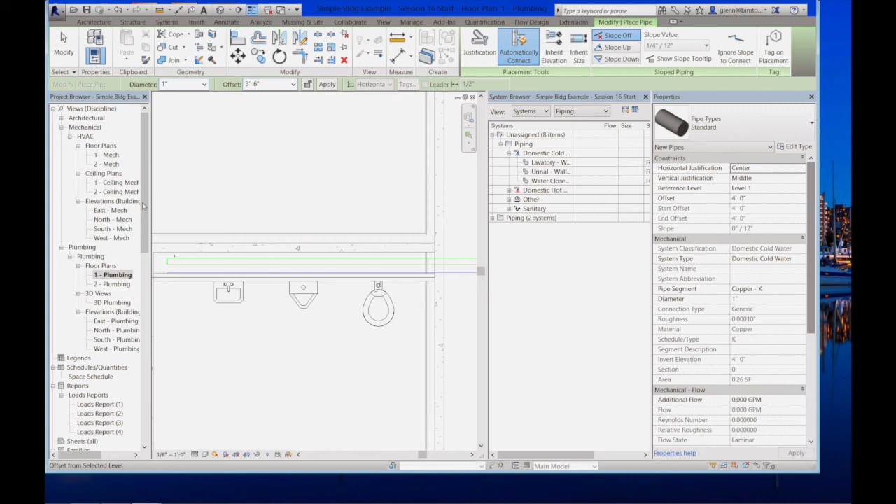Okay, it is blue, I know it's good. Let's come back over here, we'll do the red one and make this work. So again, I'm going to apologize for this roundabout way of doing it, but there's a lot of things about piping that vex me sometimes too. Don't feel too bad, it's just fighting with this stuff because the complexity of doing a good job is sometimes cumbersome.

In that case, I didn't choose the type, it still thinks it's cold water, but I should be able to change it. Let's come back over here and make it hot water, and then I'll make it red again.

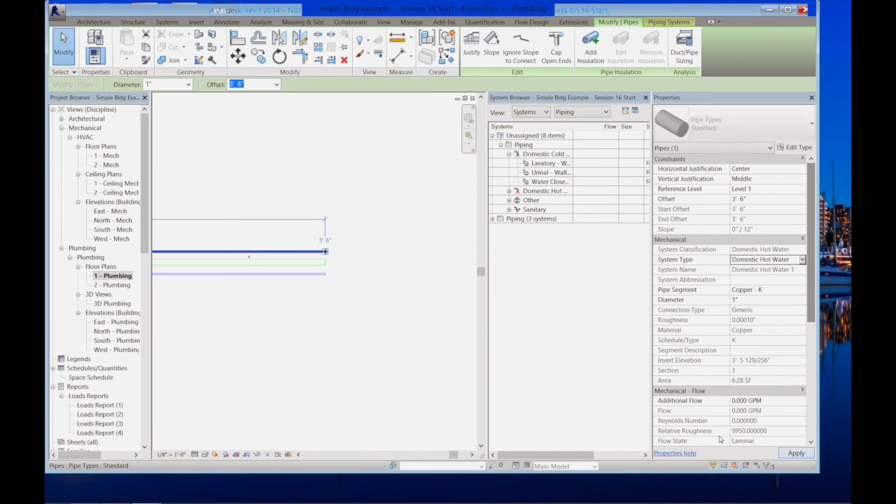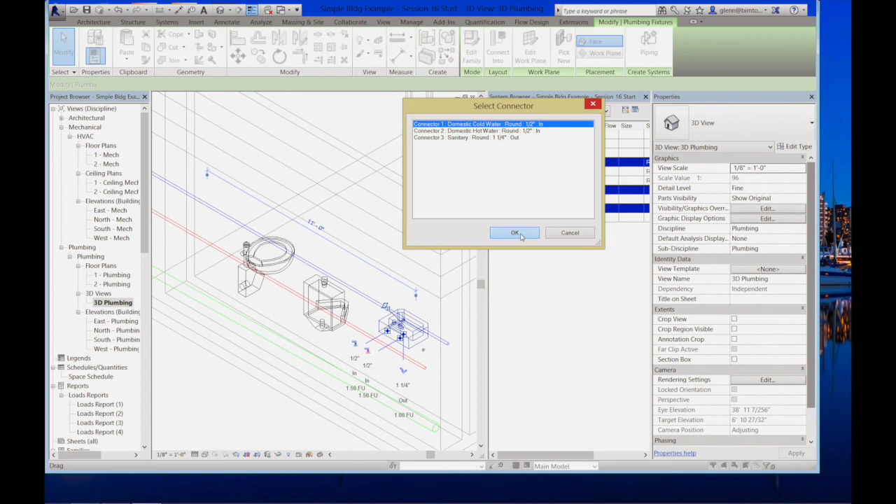Let us go back to that 3D view and go back to where we were. So the idea is we have our types now, so we're going to do that connect in again. Choose the cold water. Okay, notice it connected to the end, I'm going to leave it like that for now.

I'm going to choose this guy, connect him in also to the blue line. What will happen is, since the end of the pipe is already basically taken at this point, it'll connect it in sort of the way I want it.

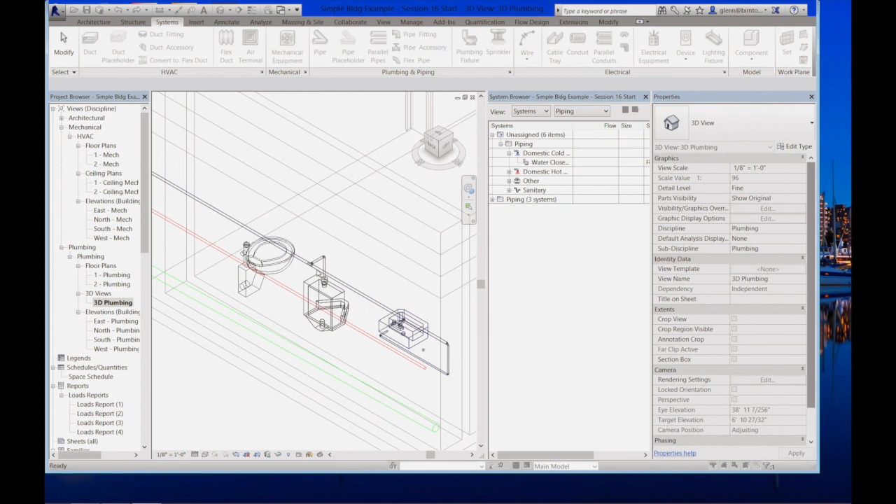And even this toilet line, we'll go ahead and put in there now too. I'll connect in, again choosing the blue line. In this case, it connected to the end, which is not what I want.

Let me undo that one. What you want to do with all these things is, as best you can, route it in a way that gives it less flexibility. Or when you know there's a route that you want, you can indicate what that route is that you want it to be. That's always a better thing to do. Let me try this now.

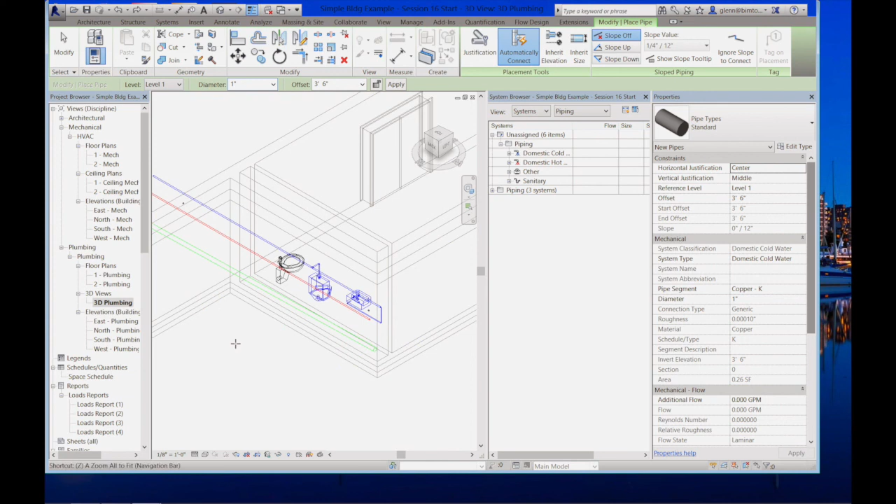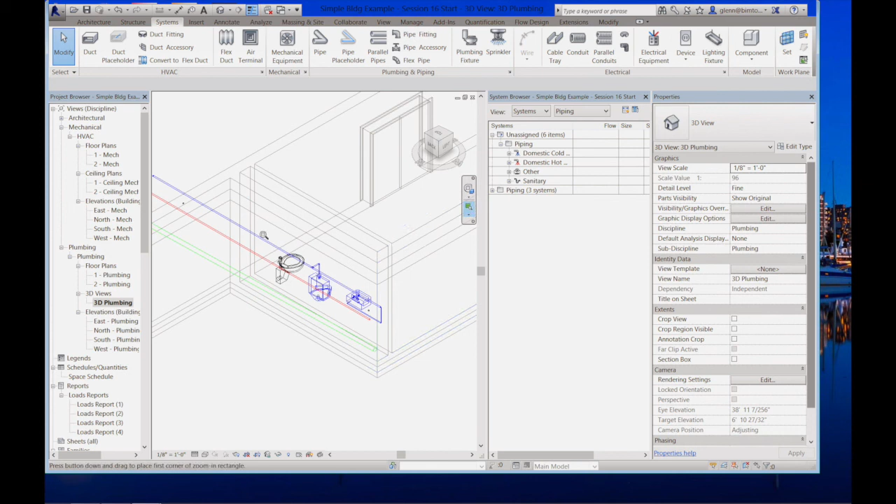I'm going to try capping that again, just because I'm hard-headed, and see if I can actually make this work. Okay, that's a little better. It looks like after it's christened as being a closed line or a cold water line, in this case it's okay to cap it. Let's try now, I'll say connect in.

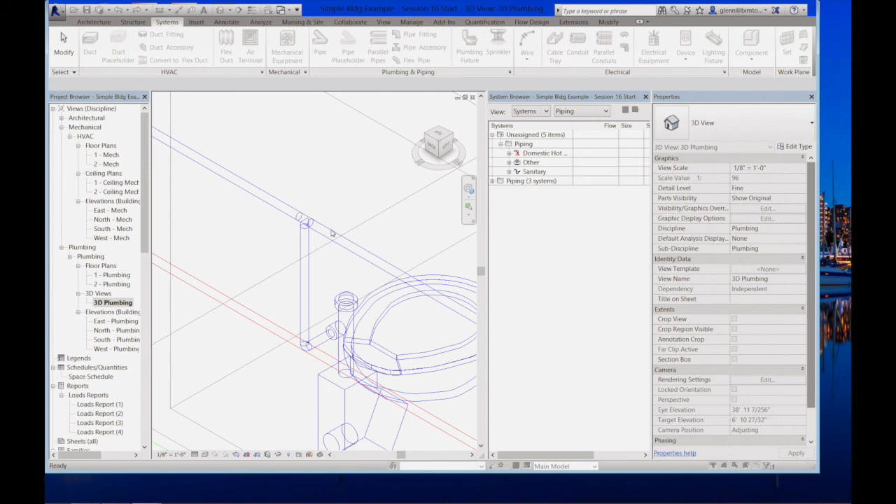Okay, and it did a little bit better. So definitely messy in terms of the whole notion of capping, but let's see if we can make some sense out of this.

I'm going to do something similar. Actually, pause there for a second, just to give everyone a chance to catch up, because I know that was a confusing section in terms of what's going on here. Okay, sounds okay, any general questions about that?

I know this whole, it seems like the best thing to do is connect the pipe to one of the fixtures so it's understood as being part of a system. You want to create the system, and then once we cap it, we're actually okay.

When we make our HVAC and plumbing, should we create a new MEP project file? Can we directly place in the original Revit file? Okay, a very good question, and it's really a choice. You can put it all in the same file, or you can make it in a separate file. In industry, often you'd make two separate files, so an MEP consultant would make their own file and we'd link them together. But you can put it all in your own single file, it's really just a matter of how you want the complexity to be. Since it's you working alone on this, it's fine to put them together into a single file. But often we put two separate files and link them together based on the coordinates.

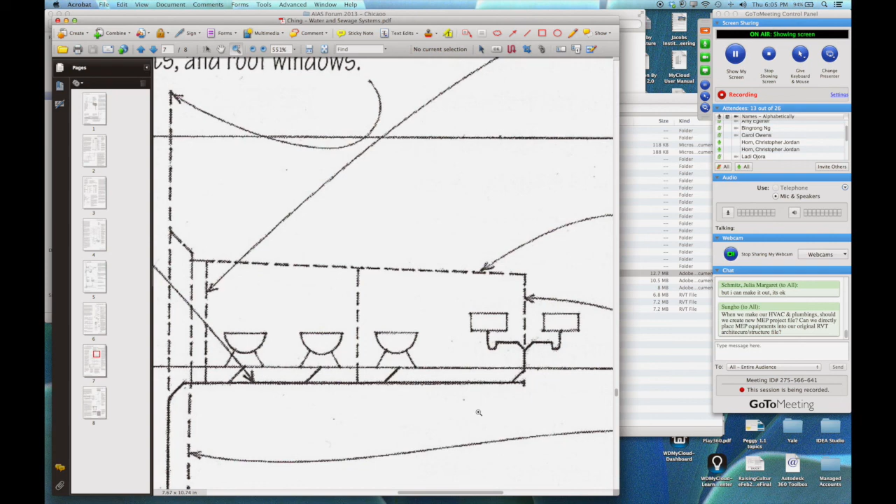Okay, any other high-level questions? Super, okay, let's go ahead and take it a little bit further.